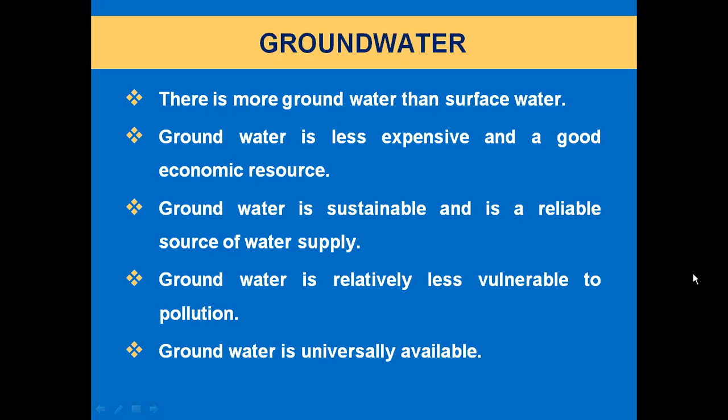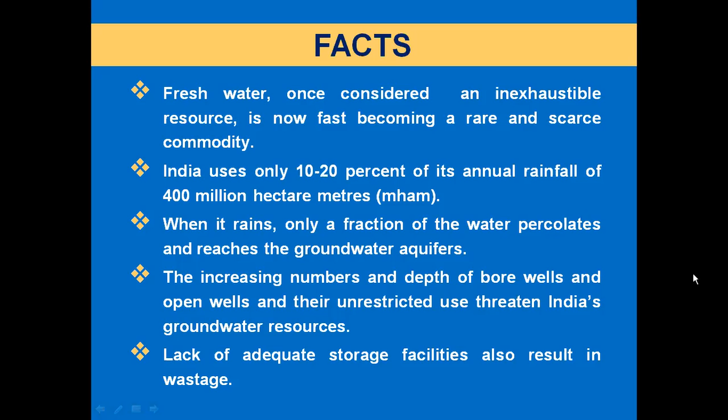Facts: fresh water, once considered an inexhaustible resource, is now fast becoming a rare and scarce commodity. India uses only 10 to 20% of its annual rainfall of 400 million hectare meters. When it rains, only a fraction of the water percolates and reaches the groundwater aquifers. The increasing numbers and depth of borewells and open wells and their unrestricted use threaten India's groundwater resources. Lack of adequate storage facilities also results in wastage.

Artificial recharging: the problem of groundwater depletion can be best tackled by harnessing every drop of rainwater. Artificial recharging to augment groundwater resources has become a necessity. We should therefore develop and popularize some cost-effective rainwater harvesting methods in urban and rural areas.

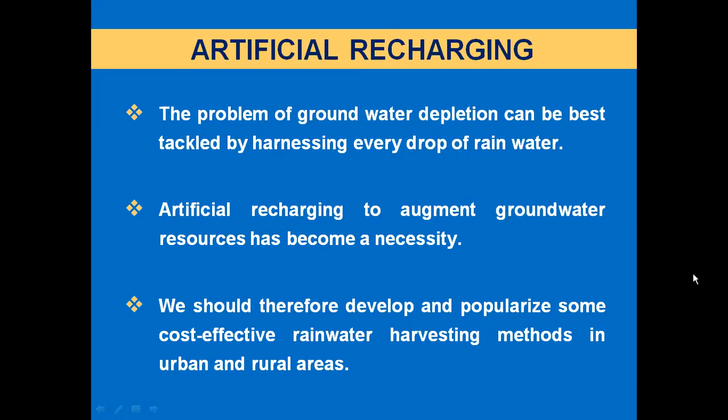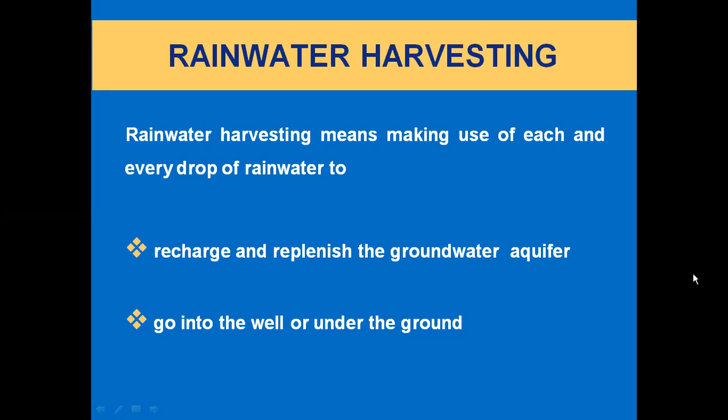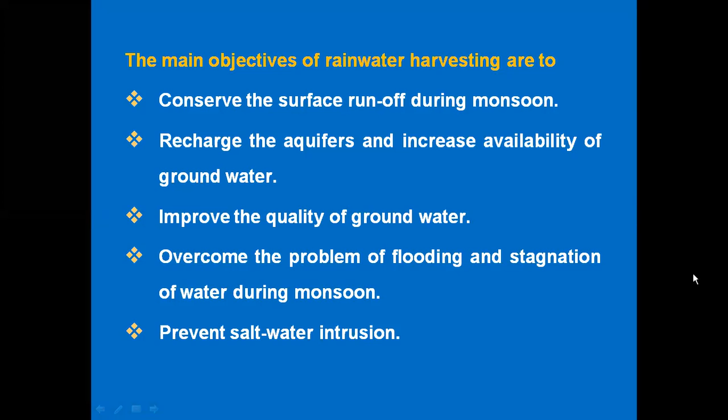Rainwater harvesting means making use of each and every drop of rainwater to recharge and replenish the groundwater aquifer, going into the well or under the ground. The main objectives of rainwater harvesting are to conserve surface runoff during monsoon, recharge the aquifers and increase availability of groundwater, improve the quality of groundwater, overcome the problem of flooding and stagnation of water during monsoon, and prevent salt water intrusion.

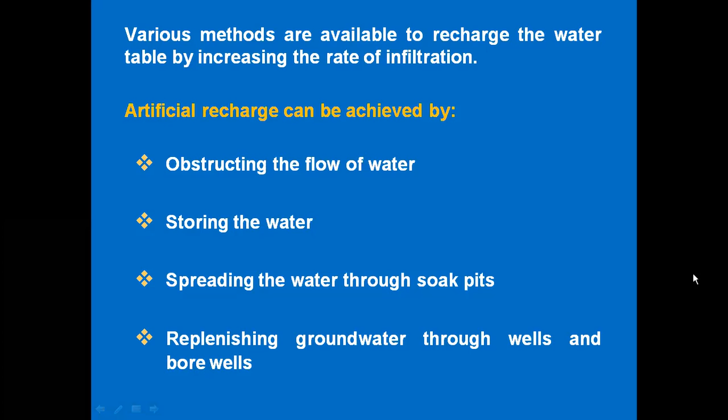Various methods are available to recharge the water table by increasing the rate of infiltration. Artificial recharge can be achieved by obstructing the flow of water, storing the water, spreading the water through soak pits, and by replenishing groundwater through wells and bore wells.

The following are some methods used to recharge the groundwater: pebble bed method, percolation pits, recharge wells, ridges and furrows, check dams, gully control stone wall structures, contour bunding, trenching, and land flooding.

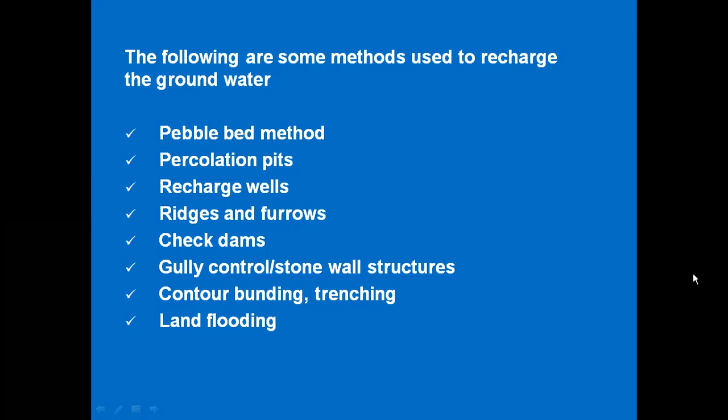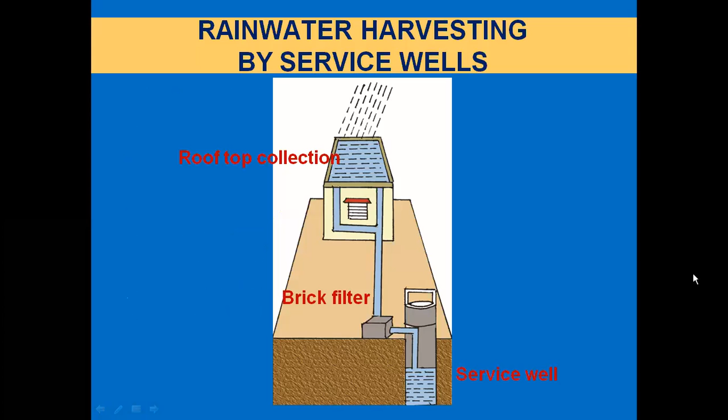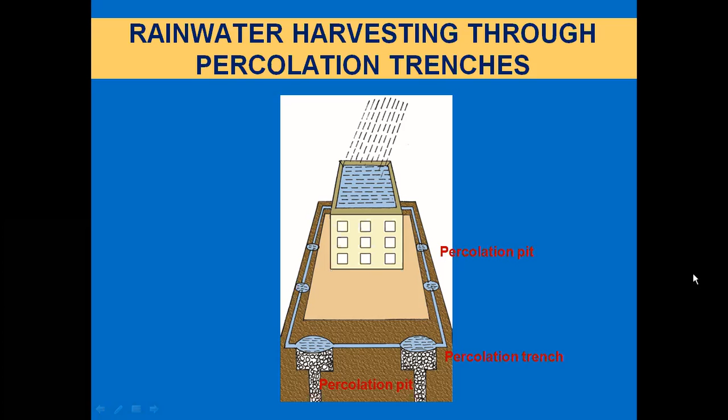Rainwater harvesting by service wells: rooftop collection, to brick filter, to service well. Rainwater harvesting through percolation trenches: percolation pit to percolation trenches. Rainwater harvesting through pebble beds: size of recharge pit, breadth 0.5 to 1 meter, depth 1 meter to 1.5 meter.

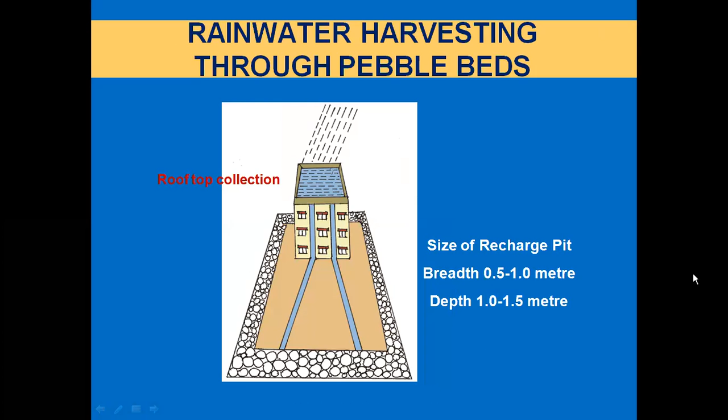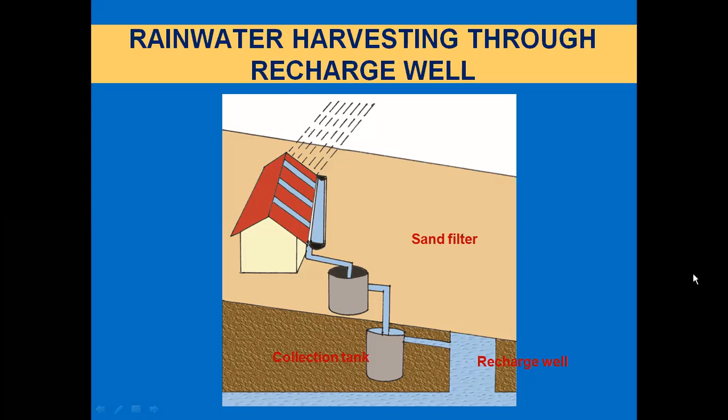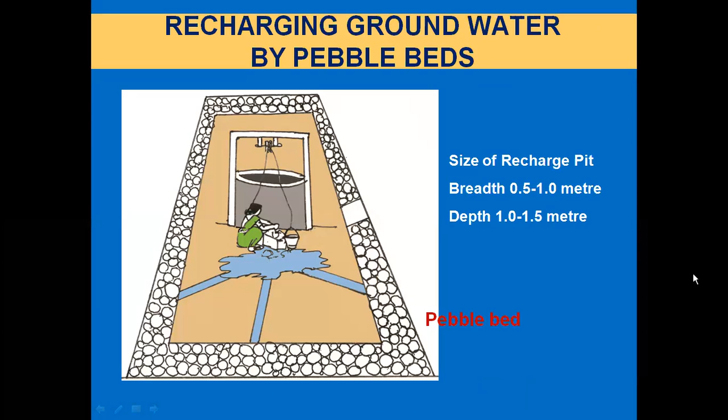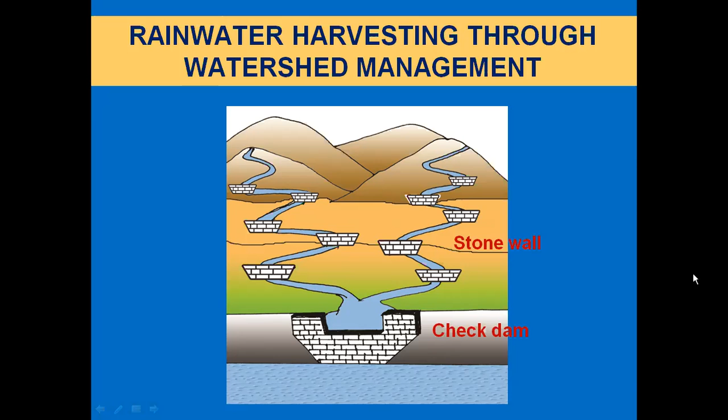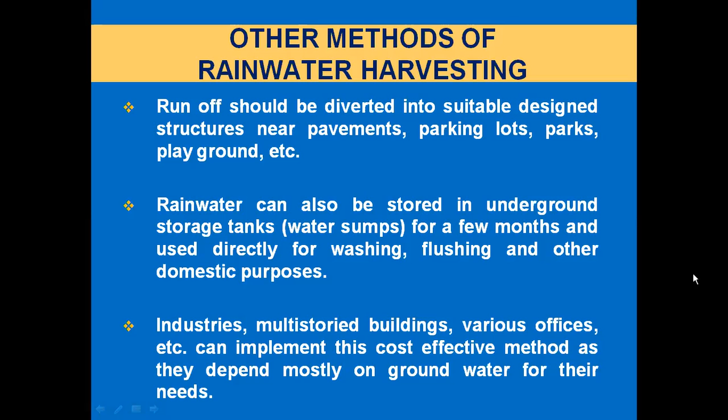Other methods of rainwater harvesting: runoff should be diverted into suitably designed structures near pavements, parking lots, parks, playgrounds, etc. Rainwater can also be stored in underground storage tanks and water sumps for a few months and used directly for washing, flushing and other domestic purposes. Industries, multi-storied buildings, various offices, etc. can implement this cost-effective method as they depend mostly on groundwater for their needs.

How much water can be harvested? Consider a building with a flat terrace area of 100 square meters. The average annual rainfall in Chennai is approximately 1100 millimeters or 44 inches. In simple terms, this means in 1 year, the rainwater harvested from the terrace: area of flat is 100 square meters, height of rainfall is 1.1 meters or 1100 millimeters or 44 inches.

Volume of rainfall over the flat is equal to area of flat into height of rainfall, that is 100 square meters into 1.1 meters, which equals 1,10,000 liters. Assuming that only 60% of the total rainfall is effectively harvested, the volume of rainwater harvested is 66,000 liters. This volume is about 4 times the annual drinking water requirement of a 5-member family.

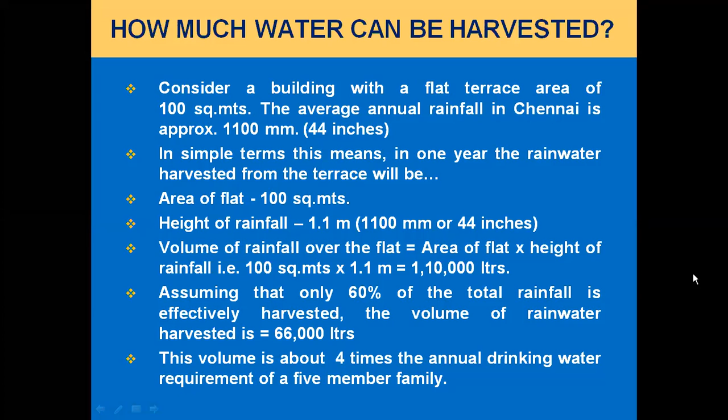Improving water quality by rainwater harvesting. In urban areas, CPR Environmental Education Centre has installed a huge rainwater harvesting system within its campus at Chennai, consisting of 24 recharge bore pits and 4 infiltration trenches.

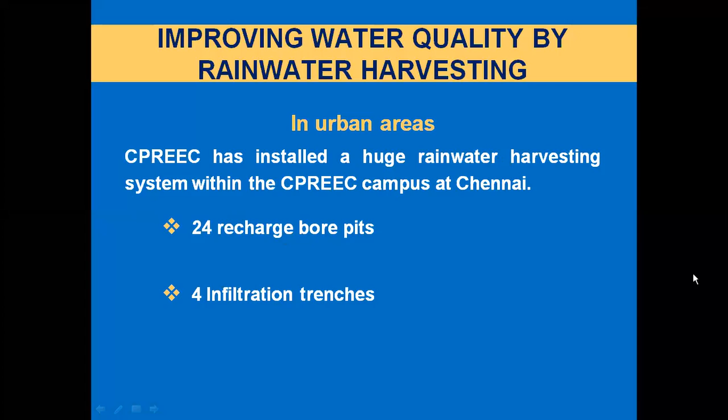The recharge bore pits are about 20 feet deep and filled with pebbles.

Percolation pits of size 1 meter by 1 meter by 3 meters may be dug a little away from the building. The pit is then filled with brick jelly or pebbles, followed by river sand for better percolation. The top layer of sand may be cleaned and replaced once in 2 years to remove the settled silt for improving percolation.

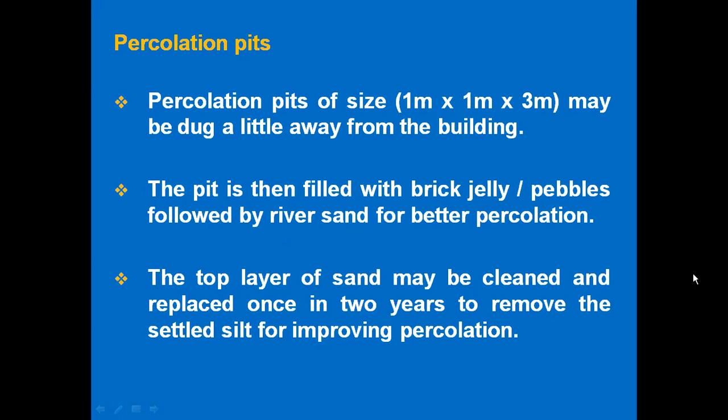The trenches are 40 feet long and 3 feet wide, with a depth of 4.5 feet. Each trench has 5 bore pits, 11 feet deep. The pits are filled with pebbles and the trenches are covered with a metallic mesh.

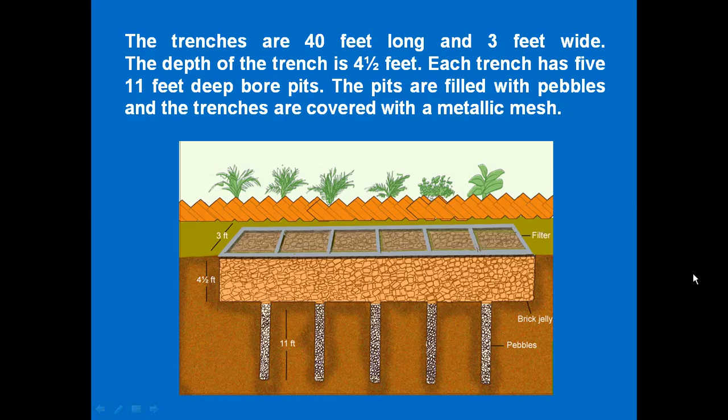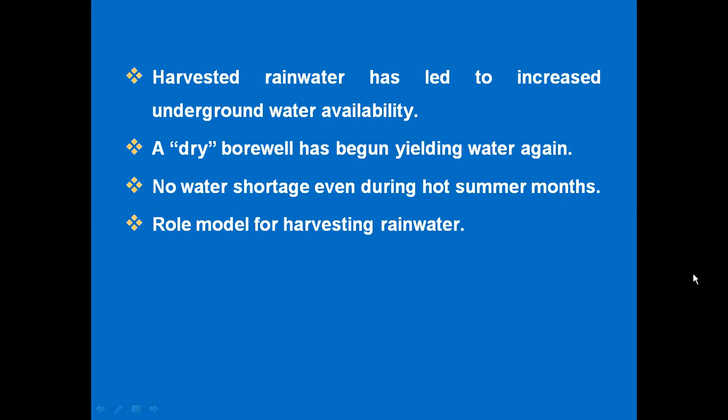Harvested rainwater has led to increased underground water availability. A dry borewell has begun yielding water again, and there is no water shortage even during hot summer months. This site is a role model for harvesting rainwater.

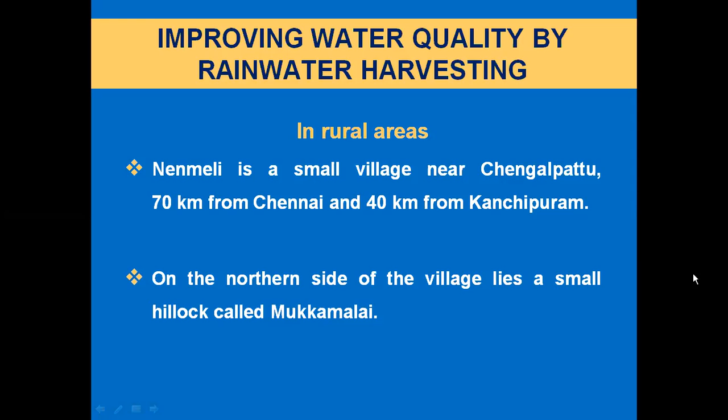In rural areas, improving water quality by rainwater harvesting. Nenmeli is a small village near Chengalpattu, 70 kilometers from Chennai and 40 kilometers from Kanchipuram. On the northern side of the village lies a small hillock called Mukkamalai.

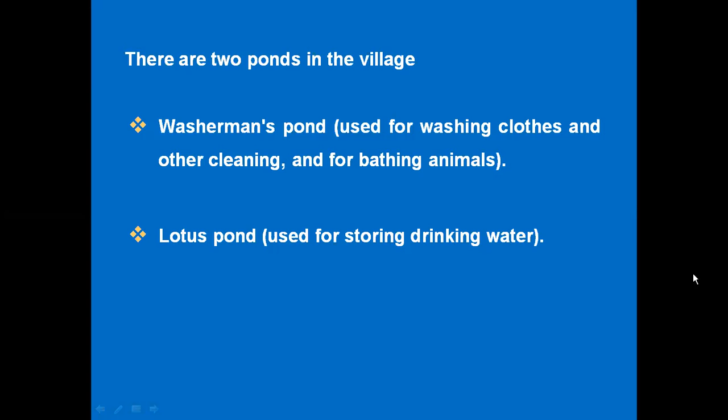There are 2 ponds in the village: the washerman's pond, used for washing clothes and other cleaning and for bathing animals, and the lotus pond, used for storing drinking water.

But the village still lacked water. Why? During the rains, there used to be heavy soil runoff and erosion of topsoil, which would fill up the ponds and lakes. Thus, the rainwater could not be collected in the ponds. The people of Nenmeli approached CPR Environmental Education Centre for a solution.

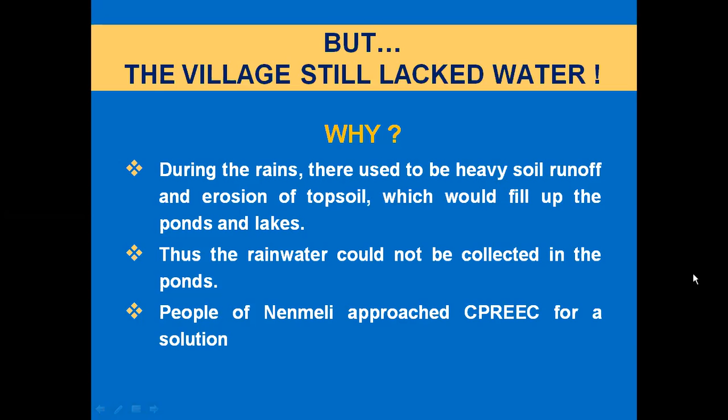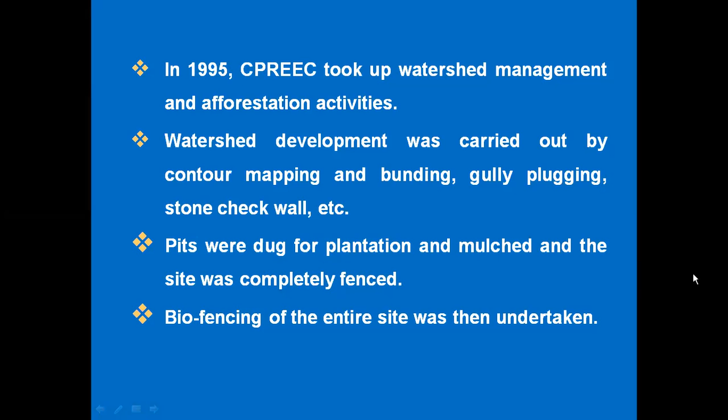Watershed development was carried out by contour mapping and bunding, gully plugging, and stone check walls. Pits were dug for plantation and mulched, and the site was completely fenced. Biofencing of the entire site was then undertaken.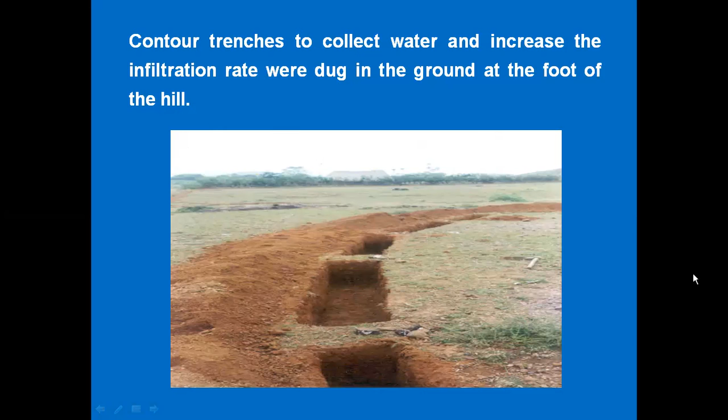Contour trenches to collect water and increase the infiltration rate were dug in the ground at the foot of the hill. Contour stone walls were constructed, and a small percolation pond was built.

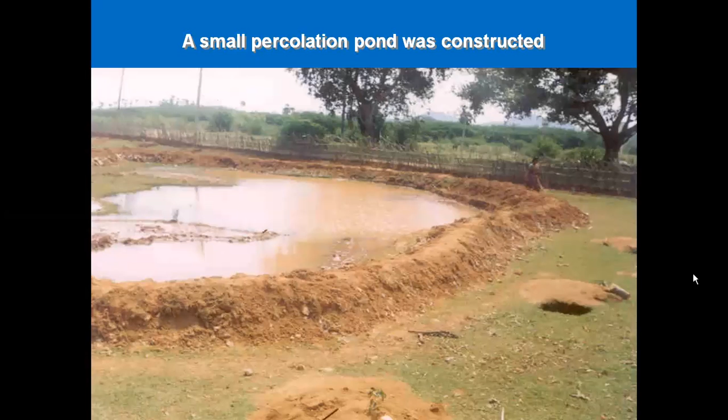Watershed management undertaken by CPR Environmental Education Centre has helped fill the surrounding ponds and tanks and also raise the level of groundwater from a depth of 30 feet to almost ground level. The entire area has become green.

The runoff of rainwater and subsequent soil erosion has ceased. The average canopy height of the trees is about 10 meters.

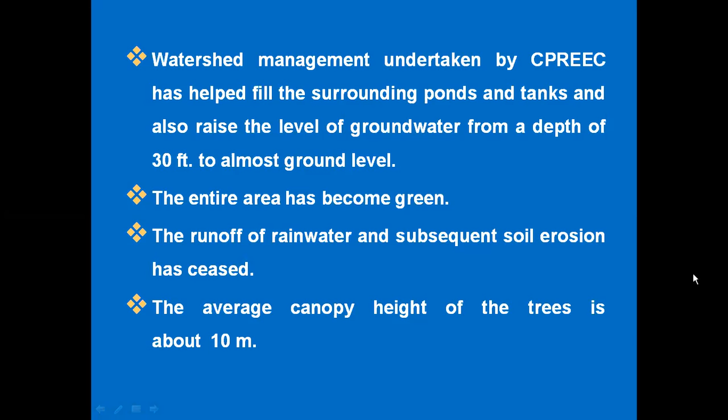The well is full of water. The water has also become more tasty due to reduction of total dissolved solids.

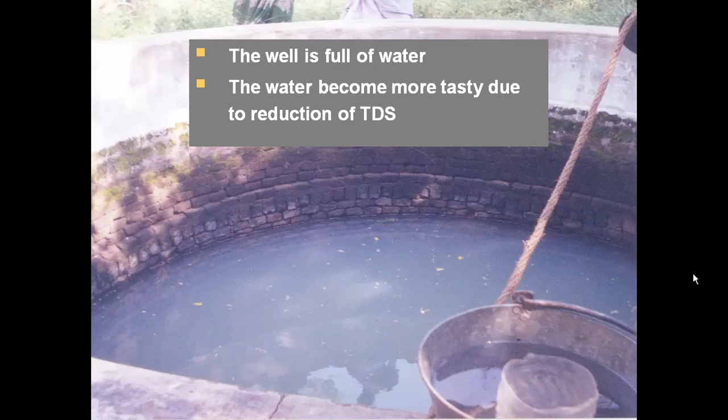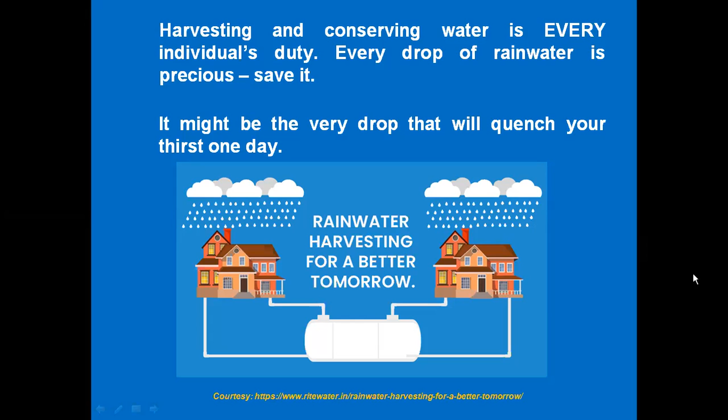Harvesting and conserving water is every individual's duty. Every drop of rainwater is precious. Save it; it might be the very drop that will quench your thirst one day. Rainwater harvesting for a better tomorrow.